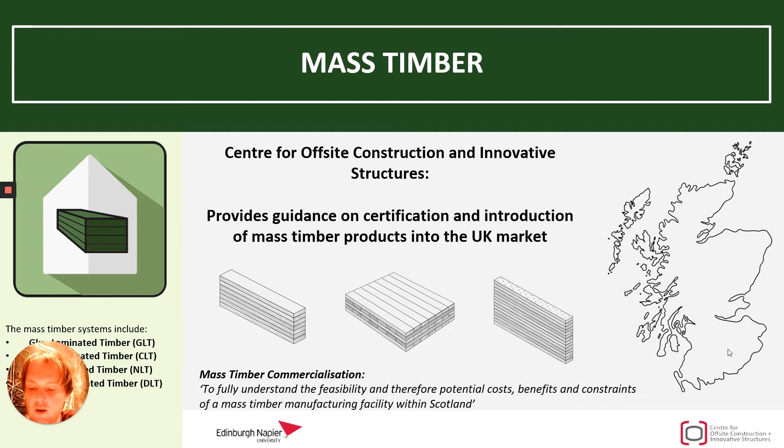I'm a consultant at the Center for Offsite Construction and Innovative Structures. My main focus and responsibilities at the center include the research and development of mass timber systems such as cross-laminated timber, glue-laminated timber, as well as nail and dowel-laminated timber. At the center, we work closely with industry partners to provide them with guidance on certification and introduction of mass timber products to the market. Our ultimate goal is to commercialize mass timber manufactured from homegrown resource.

The reason behind the research is that currently the majority of timber used in construction is being imported from abroad. Also, sawn timber comes with certain limitations, such as maximum sizes available or the presence of naturally occurring defects. In case of mass timber, this is not an issue, as the maximum size is only limited to manufacturing capacity, handling and transportation constraints.

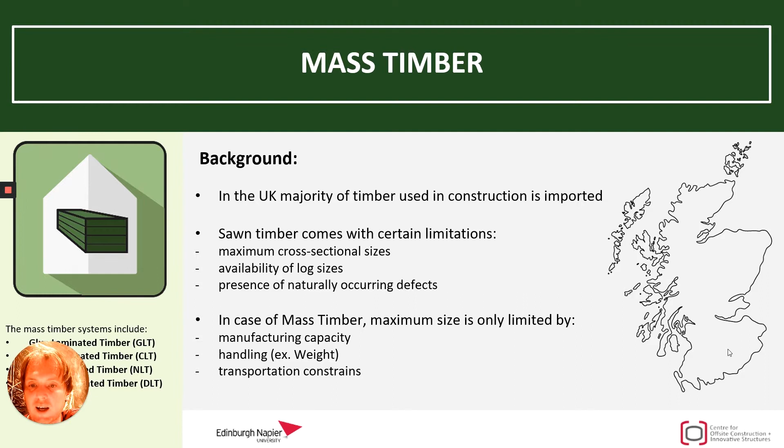Further benefits of mass timber include enhanced strength and stiffness as compared to sawn timber, as well as increased size and scope of applications and dimensional consistency.

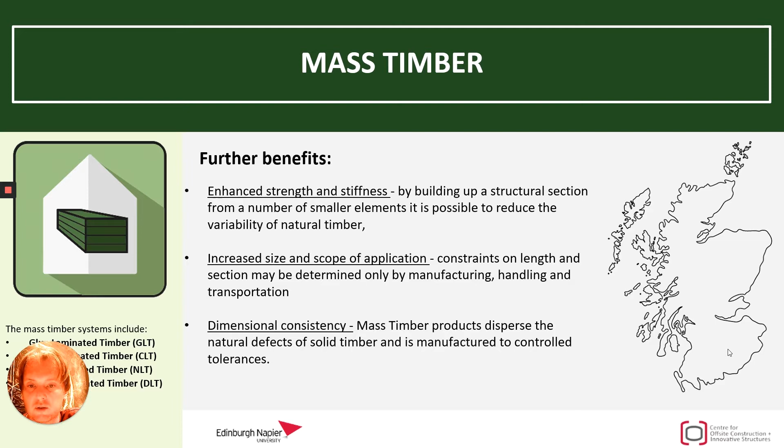The term mass timber denotes the family of solid laminate timber systems produced by connecting a series of smaller timber together to form larger panel or beam members. There are various forms of mass timber systems currently available on the market. This includes systems that are glued, such as CLT or glue-laminated timber, and those that are not glued, such as nail-laminated timber, and others that use moisture movement for connectivity, such as dowel-laminated timber.

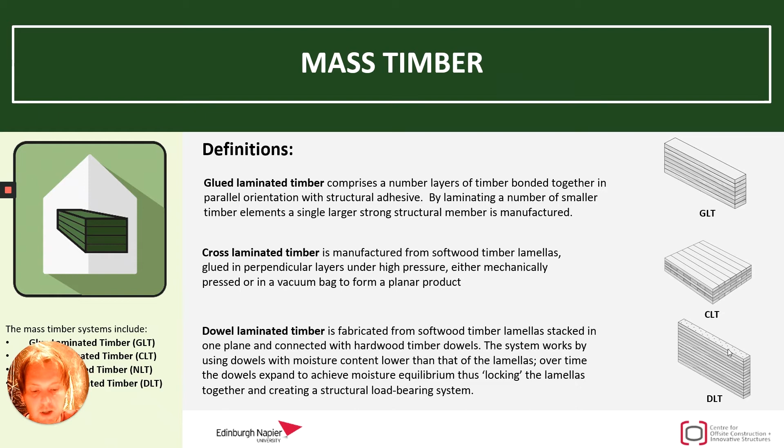Mass timber systems can be used for a variety of applications. For example, glue-laminated timber is often used for post and beam construction, and can also be used to form feature trusses as well as curved structural shapes. CLT, DLT, and NLT are often used for floor, wall, and roof elements.

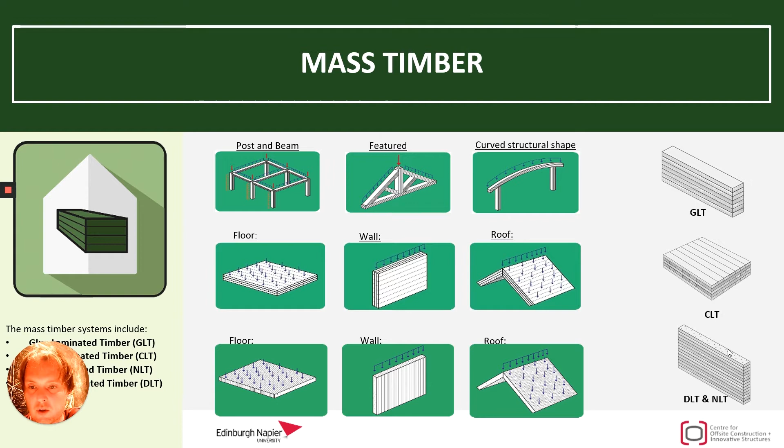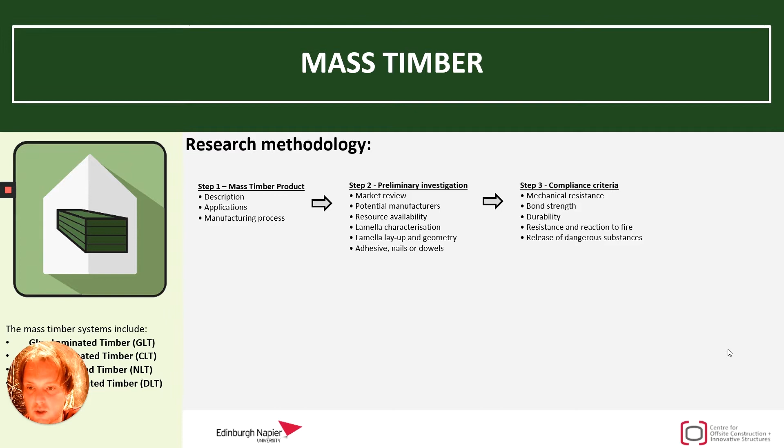In order to provide comprehensive research, it is recommended to follow an appropriate research methodology. The research into mass timber systems starts with selecting the right product, its applications, and the manufacturing process. This step is followed by the preliminary investigation, where the researcher looks at market, potential demand, resource availability, and resource characteristics. The next step is to review the current standards, to ensure that the product will be of high quality and will fulfill the requirements.

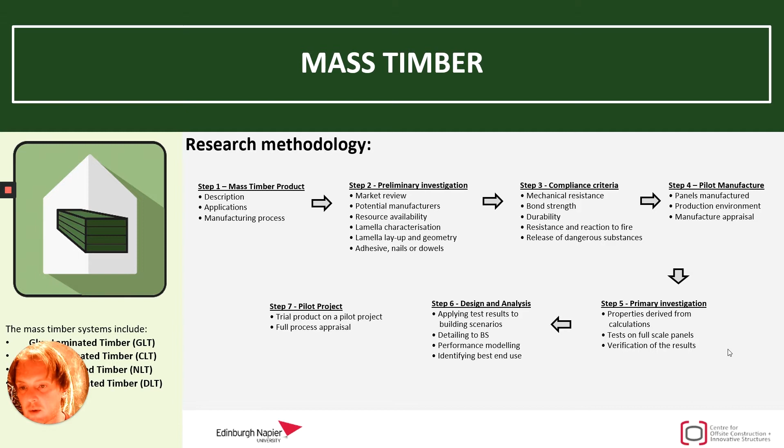This is followed by the pilot manufacture and a primary investigation, which involves testing of pilot manufactured panels and beams. Step number six is design analysis, where test results are applied to real building scenarios. This is where detailing in accordance with British standards takes place, as well as performance modeling and identifying the best end use for the product. Finally, the last step of the research is to trial the product on a real project.

A large amount of research is related to the preliminary investigation. This is where we look more closely at the timber resource available in the UK, as well as its key characteristics. At this stage, we are also investigating market opportunities for each of the products and the capital investment needed to set up a manufacturing plant.

Finally, keeping all of the above in mind, we are investigating the optimum lamella configuration that could be best utilized for the market.

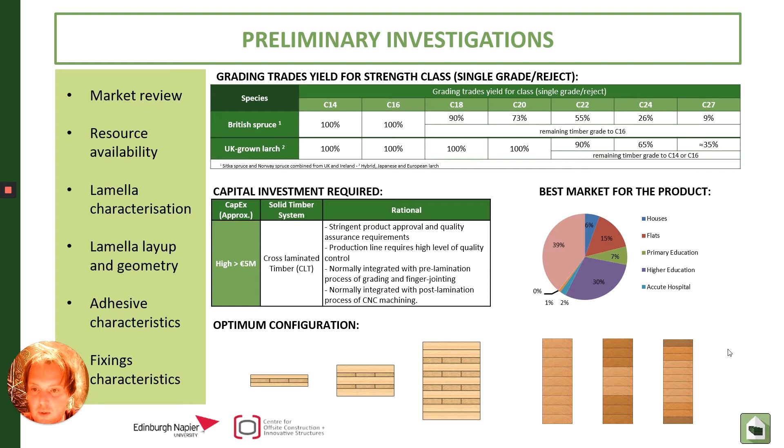Our research activities are also often related to the manufacturing aspects of mass timber, such as providing the specification for the panels and the production assessment. This is to ensure that UK homegrown timber is capable of fulfilling the requirements set out in recognized international standards, but also that it is capable of forming a high quality product good enough to compete on the market.

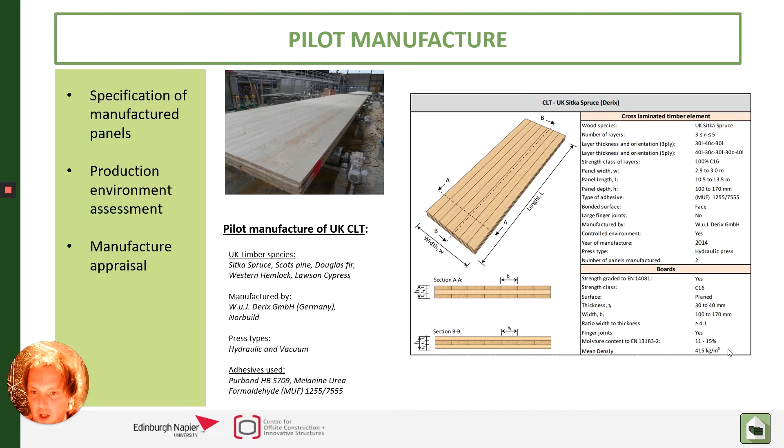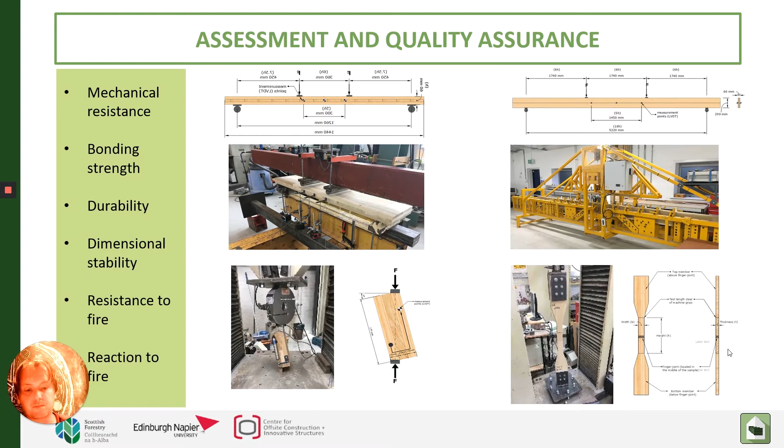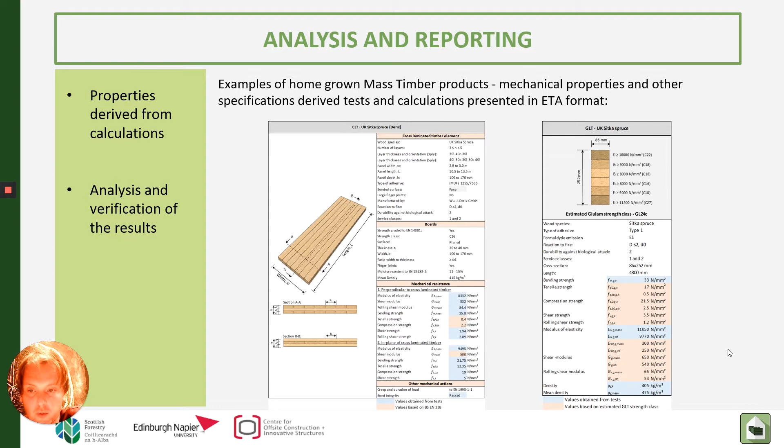The results obtained from testing and other assessment procedures are often reported and analyzed. At this stage, care is taken to ensure that reports and any other literature created in this process is of good enough quality to form a basis for the certification process.

Finally, when enough research has been undertaken, the results and outputs from the work can be applied to real building scenarios. Only by trialing the mass timber systems on a real project can we ensure that the product under development will be fit for purpose.

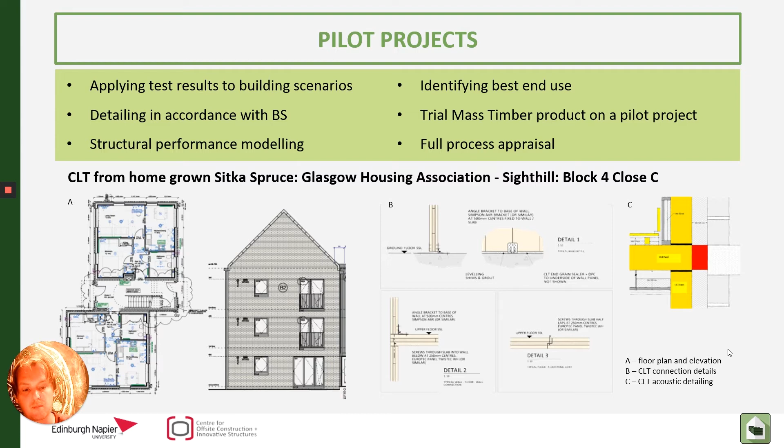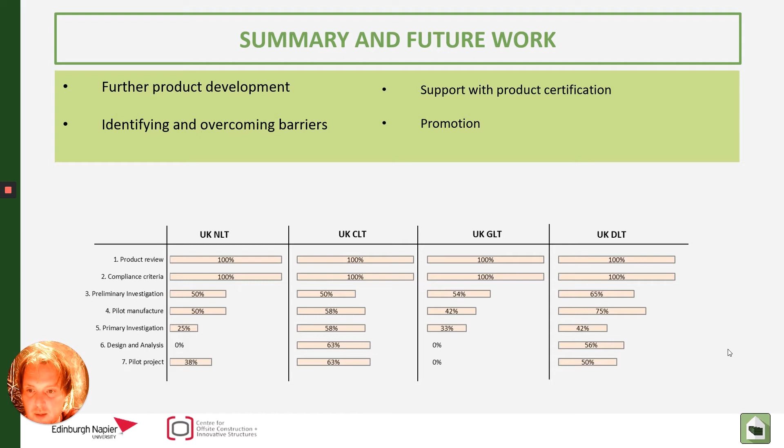To show you how research was put into practice, I'll use this project as an example. It's a Tulipwood CLT project, so the CLT panel manufactured from a Tulipwood tree.

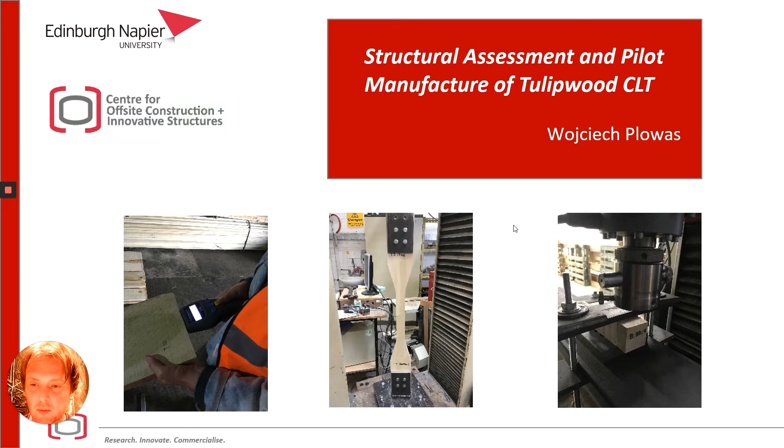Tulipwood CLT test program was introduced to Napier University as part of the Multiply project. Multiply is an innovative demonstration project consisting of a timber sculpture built from CLT, which was presented at the London Design Festival back in 2018.

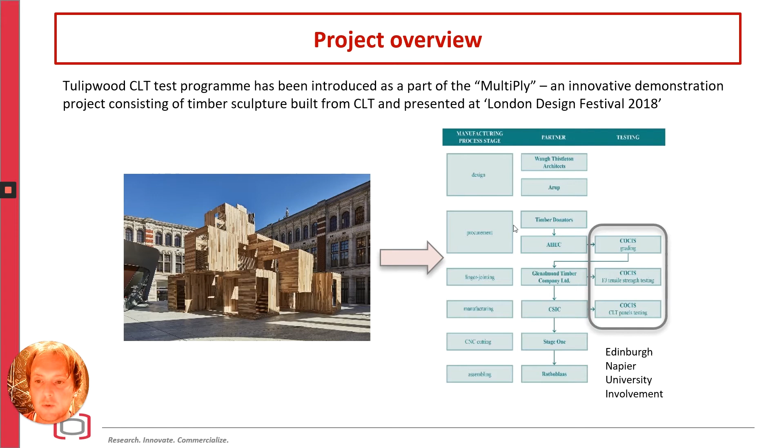There were many parties involved, and Napier University was asked to carry out the quality assurance necessary to ensure that the panels manufactured from timber we don't know much about will be of good enough quality to be used structurally. So for that, at the center, we carried out the grading of the lamellas, as well as assessment of finger joint strength and full-scale testing of the panels.

So the first thing is to look at what tulipwood actually is, as it's not the type of tree that occurs in the UK. So we did some research and found out that tulipwood is also known as poplar or tulip poplar, even though the tree is not related to poplars.

It's found in eastern North America and some parts of China. Tulipwood, from a structural point of view, is moderately light, so it has a low density and is moderately low in bending strength.

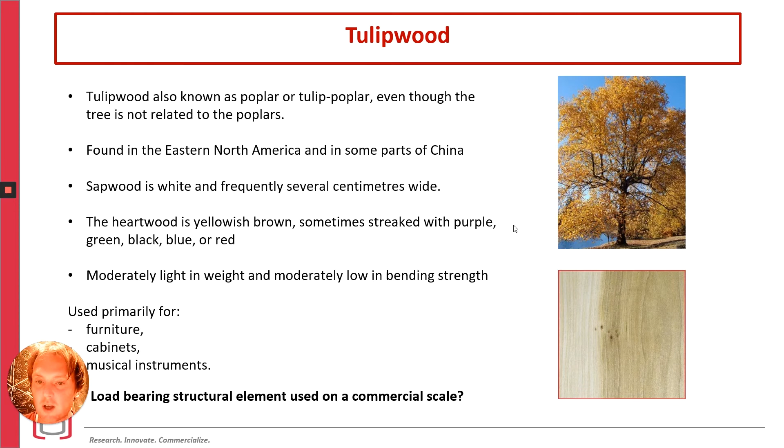Because of its appearance, we found out that tulipwood is often used for furniture making, cabinets, and musical instruments. The question was whether this type of tree can be used as a load-bearing structural element on a commercial scale. This is the question we try to answer via this project.

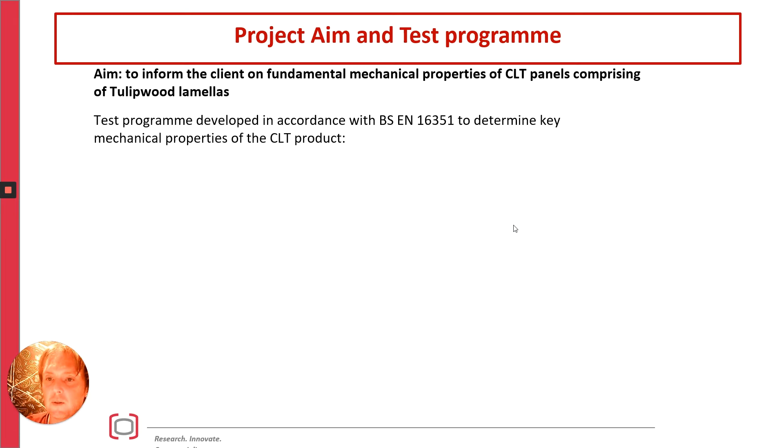So the aim of this project was to inform the client on fundamental mechanical properties of CLT panels comprising tulipwood lamellas. For this purpose, a test program was developed in accordance with a current CLT standard in order to determine those key mechanical properties.

The test program included first the assessment of the lamellas, the raw material used for the CLT manufacture. To evaluate its properties, we carried out a series of acoustic grading tests, bending tests, and tension tests. Once this was done, and we'd learned a lot about the raw material, which is tulipwood, we moved on to...

...assessment of full-scale panels, CLT panels made out of tulipwood. For this purpose, we tested these panels in perpendicular orientation and in-plane orientation. This is to replicate the floor and wall elements in the real structure.

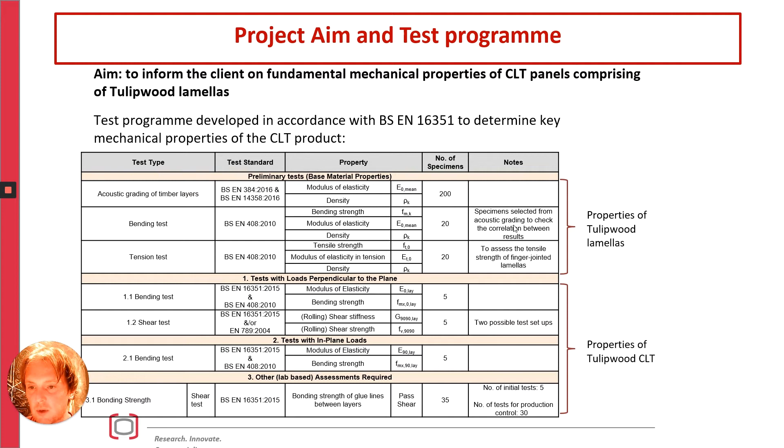Lastly, we carried out a series of glue line shear tests. This is to estimate the strength of the joint between the lamellas.

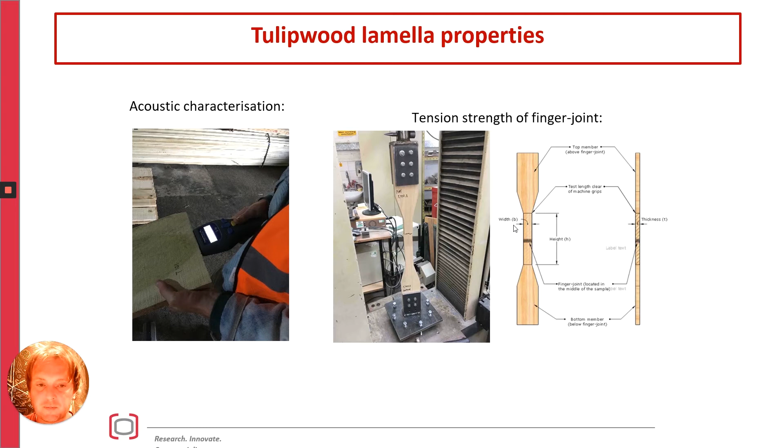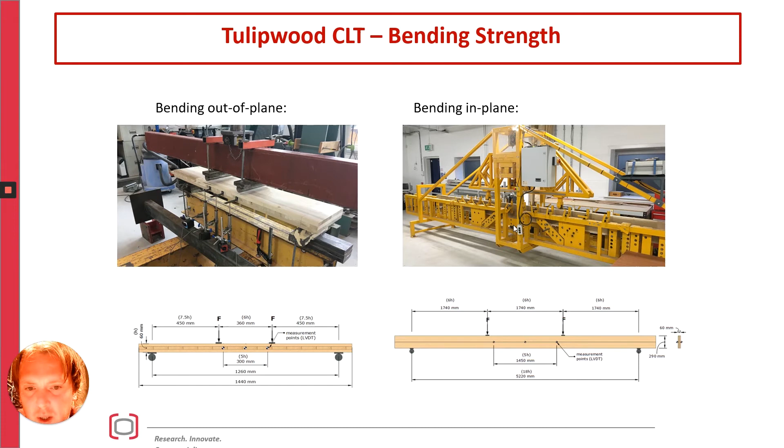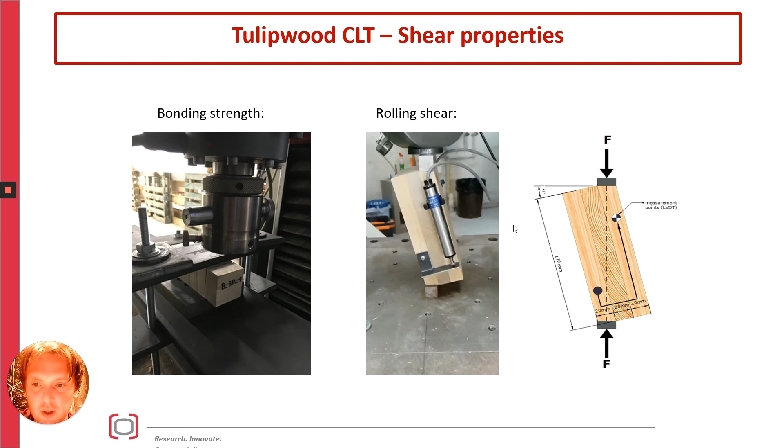On the left-hand side is a glue line shear test. We used this opportunity to also check the influence of the primer applied to the boards prior to bonding. On the right is the rolling shear test setup, also a quite important property to ensure the load transfer between the top and bottom lamellas.

After crunching the data, we came up with results which we compared to products currently available on the market. In many cases, Tulipwood CLT turned out to be stiffer and stronger, with the exception of the bending stiffness perpendicular to the grain, or out of plane. But at 11,000 newtons per millimeter squared, it's perfectly enough to form a structural element.

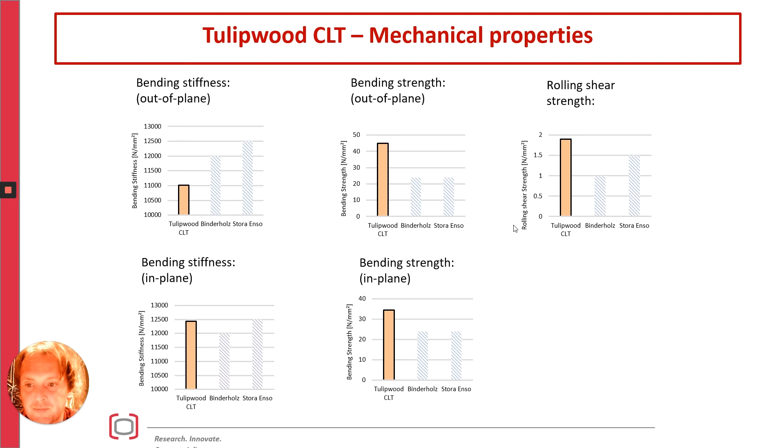After evaluating the structural performance of the CLT made out of tulipwood, we looked at the production requirements, which are listed in the British standard. Here are some interesting facts I've extracted from the standard.

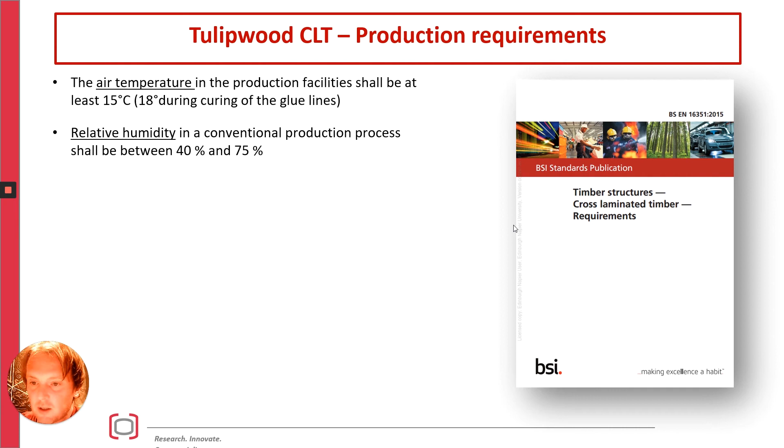During manufacture, the air temperature in the production facility shall be at least 15 degrees centigrade, and 18 degrees during curing of glue lines. According to the standard, relative humidity in a conventional production process shall be between 40 and 75%. At assembly, the moisture content of each board shall be between 6 and 15%.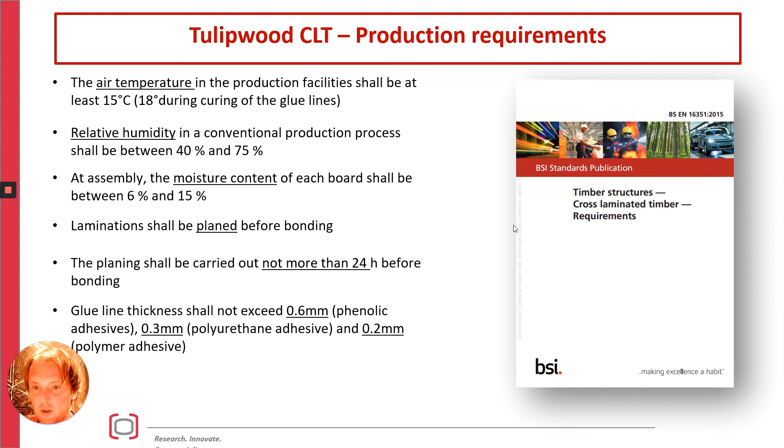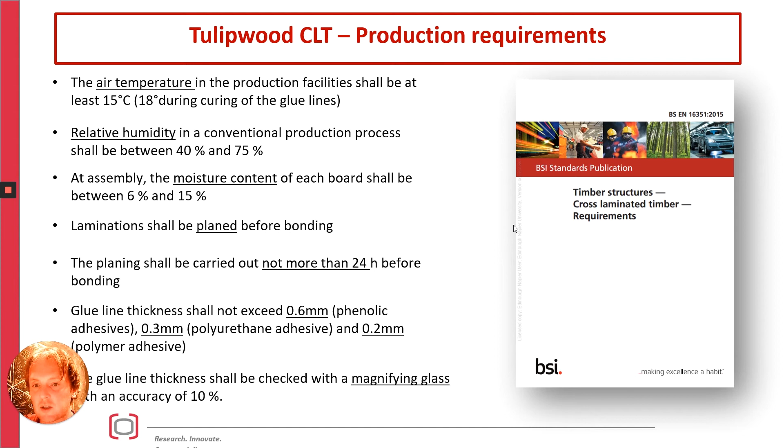All laminations used in the CLT should be planed before bonding, and the planing shall be carried out not more than 24 hours before bonding. Glue line thickness of the adhesive applied to the CLT shall not exceed 0.6 millimeters, or 0.3 millimeters if it's polyurethane adhesive. Glue line thickness shall then be checked with a magnifying glass with accuracy of 10%.

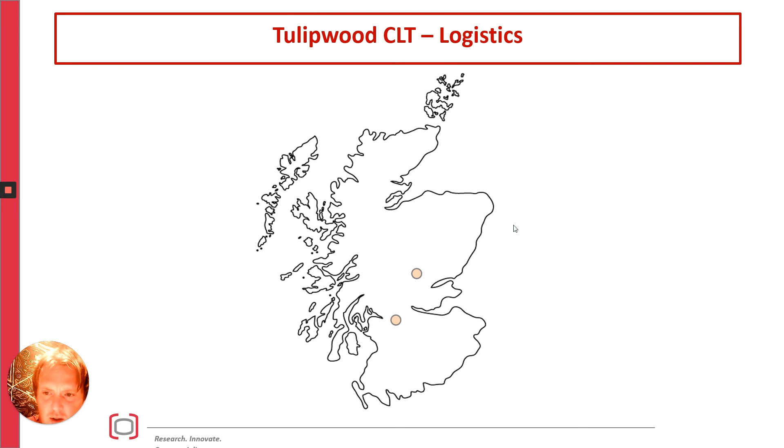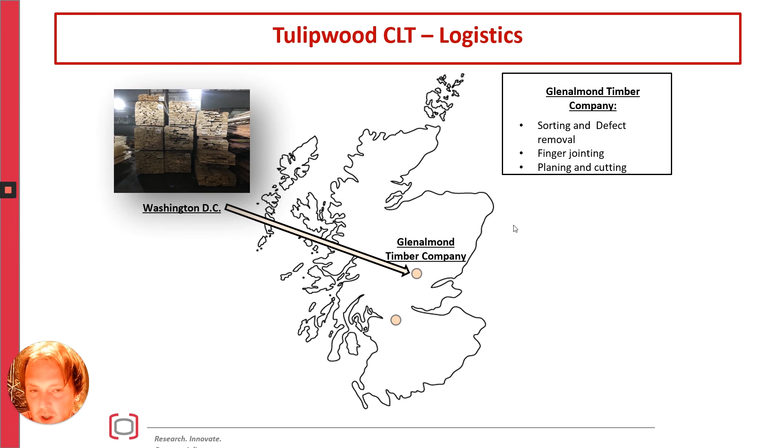Here's some logistics. As mentioned at the beginning, tulipwood is not native to the UK, so several containers were shipped from Washington DC and transported to Glenalmond Timber Company, who sorted the material, removed defects, and did some finger jointing, planing, and cutting to size. Once the boards were pre-processed, they were transported 61 miles away to Construction Scotland Innovation Centre, who carried out priming of the lamellas, sorting, pressing, sanding, and lacquering.

At this point, I'd like to note that planing shall be carried out no more than 24 hours before bonding. That proved challenging because the timber had to be planed early in the morning so the lamellas could be transported and bonded within the 24 hours.

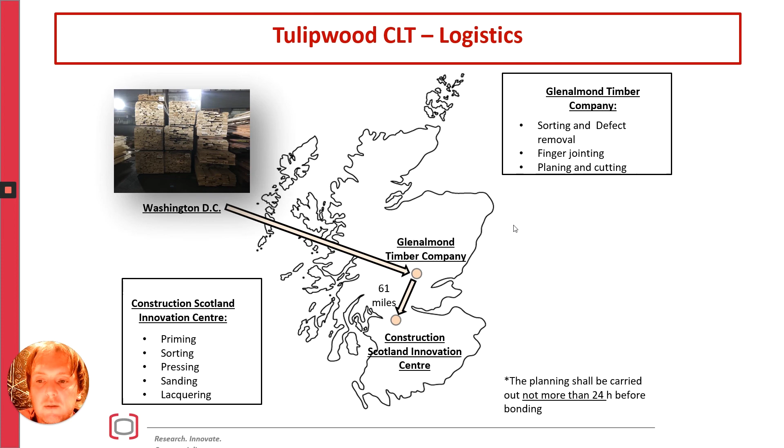Here are some pictures taken during production. Upon arrival to the production line, each lamella was checked for moisture content, then the primer was applied.

Primer is usually not needed when pressing CLT made out of softwoods, but because we were dealing with hardwood, the glue manufacturer raised some concerns regarding bonding strength, so they recommended using the primer. Once the lamella had been primed, they were positioned in the vacuum press, the adhesive was applied, the stacking began, and finally the pressing took place.

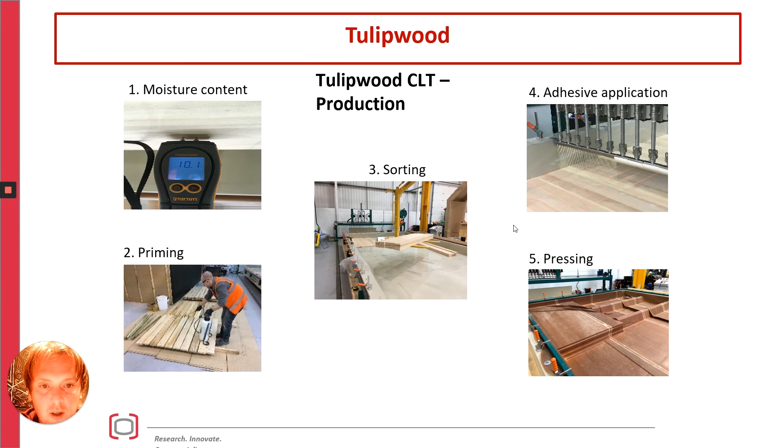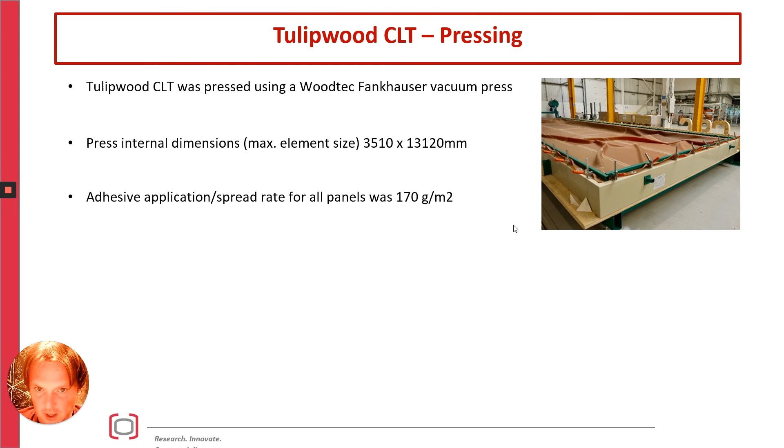Tulipwood CLT was pressed using a Woodtec Fankhauser vacuum press. The internal dimension of the press, which denotes the maximum element size, is about 3.5 meters by 13 meters. Adhesive application spread rate of our panel was 170 grams per square meter. A vacuum pump applied pressure of 150 millibars, and was then left for a minimum period of 300 minutes.

Some small note: the minimum press time when bonding softwoods is only 150 minutes, so additional precaution was taken to ensure the bond would be strong.

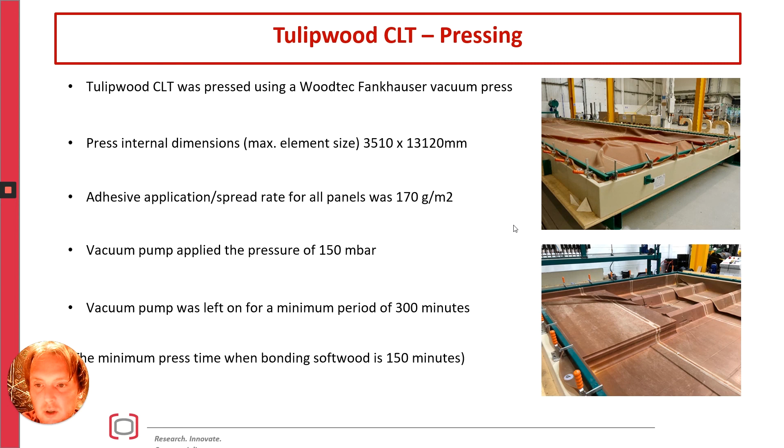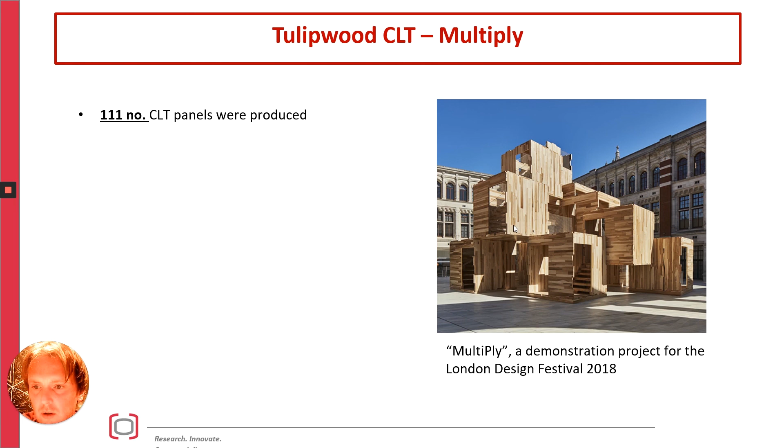Finally, some information about the MultiPly itself. Altogether, 111 panels were used to put this structure together, in 3 different configurations: 3-ply panels at 0.6 by 2.7 by 2.7 meters for non-structural use, 3-ply at 0.6, 2.7, 2.7 for structural panels, and 5-ply panels as well. The layers comprise a mix of 20 by 95 millimeter and 20 by 145 millimeter lamella for all panel specifications.